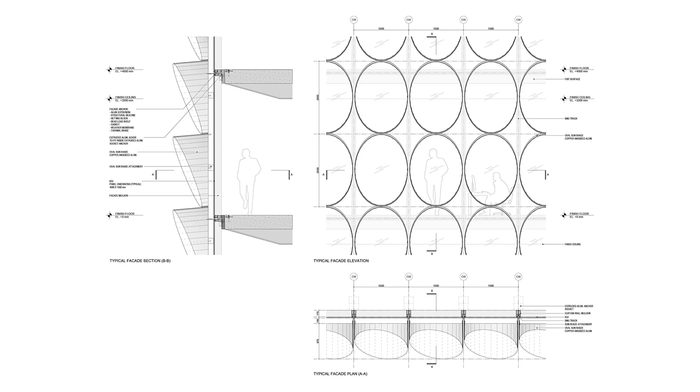This is a project we've just started construction on in Brisbane. The basic idea is pretty simple: we have these large oval-shaped brise-soleil elements that we discovered perform exceptionally well, particularly in that sun angle. They're tailored to the different facets of the building, and we thought they were incredibly beautiful.

They performed at a very high level, and they also created what we like to say is a kind of phenomena as opposed to form. We really loved it.

So when we started working on a project in the middle of design development in Brooklyn on the waterfront, we took that same idea of an oval-shaped oculi, took all the research and data we'd developed in the previous project, and applied it differently here, combining brise-soleil and balconies around the perimeter of the building.

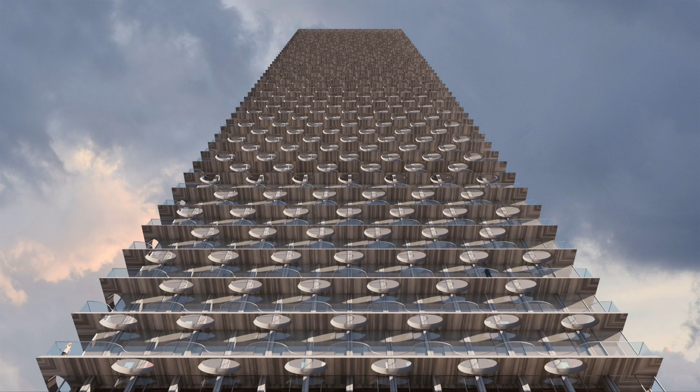There you see the oculi on the face of the building, and here you see the effect of the sort of moiré that happens on the side of the building, just to give you some sense of the aesthetic impact.

Okay, so that's just an example where I'm going to refer back to things. I have to be honest, part of the reason I included that little spiel is I didn't know how to bring those two projects into the discussion. So now we've got it.

Okay, so empowerment. As I said, for us it's really focused on flexibility. And what I'm going to try to do during the lecture is put forward a whole bunch of ideas that I think are new ideas about flexibility.

They may not be new to all of you. I'm just saying that for us, in the way we're approaching our thinking, we're starting to categorize them in different ways, and I want to challenge everyone to think about flexibility in a different way.

Our observation is that as a profession, we've been using an outdated idea of flexibility that we inherited from the modernists, who started it in the 1920s. So we've literally been using it for 100 years.

That idea is the idea of a blank slate, or because we're architects and like to complicate things, we call it a tabula rasa, on which or in which we can, in theory, do anything. That was the big modernist idea.

My favorite architect in the world, Mies van der Rohe, loved that. He probably took it to the extreme. If you know the Neue Nationalgalerie, it is exquisitely beautiful and an absolute nightmare to do anything in.

I think we can take this idea and apply it to all kinds of typologies, but it's particularly acute in visual and performing arts. In the visual arts it's the white cube, and in the performing arts it's the black box.

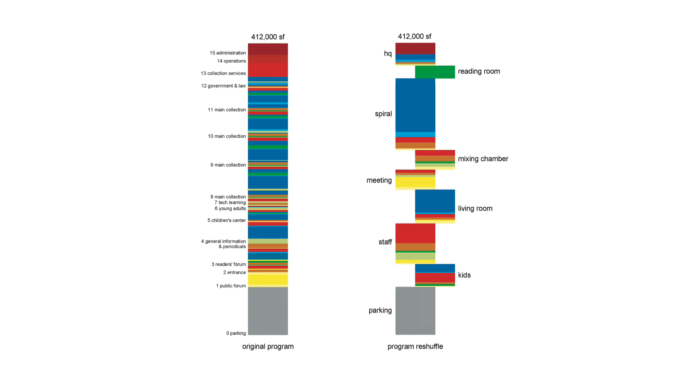So we combed through the program, and we made a series of what you see on the left. We call them platforms. Those were clusters of program that were sort of similar things plugged into them. And then the things on the right, those were more universal things that looked more like a tabula rasa, but we wanted to give them very specific characters.

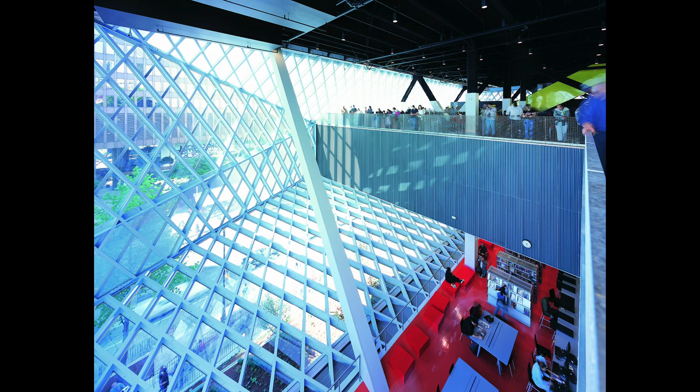And those got sized into what you're now experiencing. We call them the five platforms. Each one has a distinct architectural palette, distinct circulation, and most importantly, a distinct form of flexibility. And then there's the in-between spaces that act kind of like a public park that has been wrapped up vertically into the building. That's why the building has the very distinct characters you move through it. It's basically experiencing 5 different buildings with this continuous public park that runs through it. That was the evolution of the thinking of the building.

But let me give you an explicit example of how this idea of compartmentalization led to really profitable flexibility. I'm going to talk specifically about the book spiral and the mixing chamber, which are the two things that we collectively, I think, really invented for this project, and talk about why they became what they are. Because I think people know that there's a big book spiral up there, but I don't think they necessarily understand what the thinking was behind it.

It really had to do with this. Now, this was 2004, so we were starting in 1999. But even in 1999, we were seeing a lot of predictions about how access to information was going to become ubiquitous, and that public libraries were no longer going to be the place that you came to access your full breadth of information.

And therefore, we had to think of a paradigm shift in order to spend, at that time, $111.8 million, $111.9 million of public money. We had a lot of people saying how that should be spent. And the observation was, if access to information is no longer going to be what makes a public library unique, it's going to be access to curation that's going to make it unique. That we needed to make a building that was librarian-centric, not book, not physical material-centric.

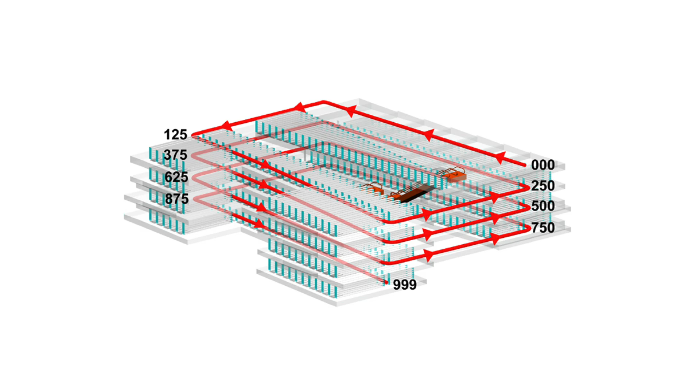The books are organized 000 to 999. Believe it or not, we did actually originally propose to put 000 at the top and 999 at the bottom, as you see in this diagram, with the belief that it'd be easier to circulate down, but the library very rightly said that's just so bizarre, we can't endorse it. So that's not what happened.

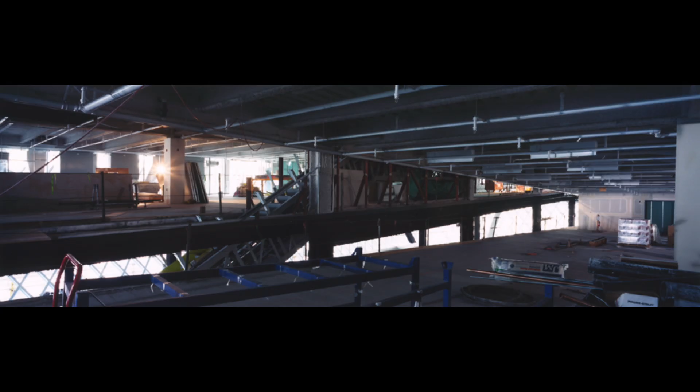And then it's literally just a parking structure. I mean, believe it or not, as much as people burn books, books don't burn as much as cars. So it's actually a much simpler problem to solve than even a parking structure.

Within that system, that's why the Dewey Decimal System is in the floor and in the elevators. As you have more and more books, you have micro expansions and contractions, the books, through reshelving, take different geometries on the book spiral. You just change the floor mats or the numbering in the elevator, so everyone can navigate with the Dewey Decimal System. That pulls the librarians out of these fiefdoms of materials and allows them to aggregate in the mixing chamber.

That, for me, was an unbelievably astonishing moment of, oh wait, tailored flexibility, really tailored specificity, is incredibly flexible. It went completely against everything I thought I understood about flexibility in architecture. That started what I think has become now a 25-year-long obsession about flexibility.

We call that approach, within our office, divide and conquer. Let me give you an example of using divide and conquer in a different way. This is a tower under construction, or two towers under construction, in Perth, Australia. They're mixed use: offices, hotel, residential, and retail.

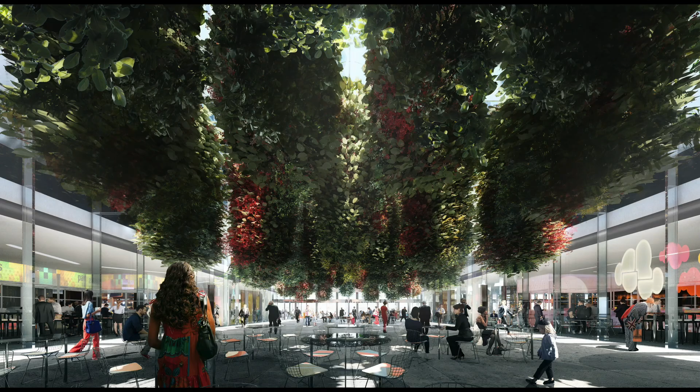So by putting the ballroom on the 27th floor, that becomes the place people want to rent for their wedding instead of the ones at the base of the other buildings. That allowed us to completely evacuate the base and provide retail and other public amenity there. Basically, pun intended, we turned the model of the other six projects around us on their heads.

But coming back to this idea of divide and conquer: all of that amenity space in the middle, we took the dimensions that, from a performance standpoint, the developers absolutely wanted. So if they said they needed a floor plate of X by Y, and Z amount of stuff, we literally made it, and promised them we'd come up with a composition while maintaining those things, that we think will be elegant.

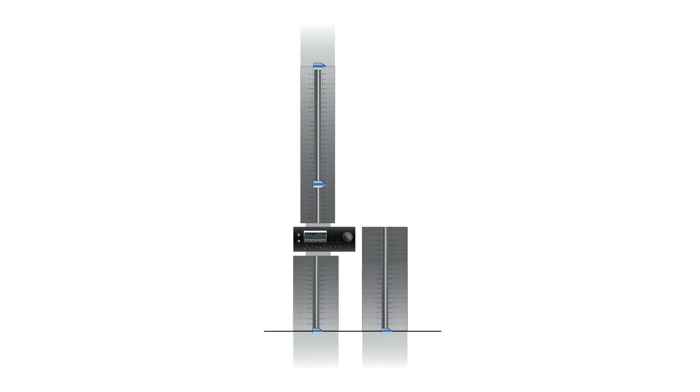There were several ideas baked into that. Once you do that, you now have the power to allow the building to fluctuate with the market. We've done several very large projects like this, and they all die. Why? Because it takes 6, 7, 8, sometimes 9 years from design to completion, and markets change, and at some point the developer almost always gets cold feet and pulls the plug. We didn't want that to happen.

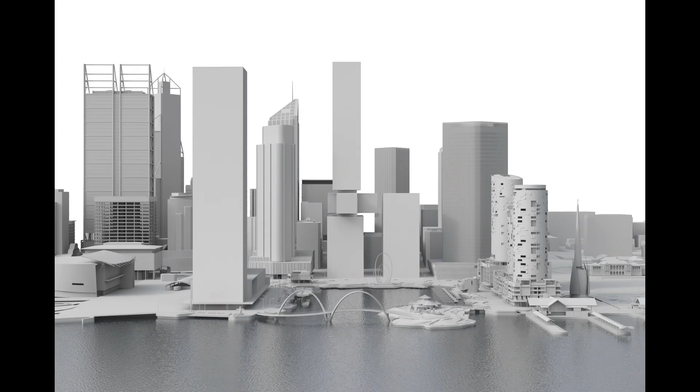So this was a way of safeguarding the project too. If we keep these different elements isolated, we could allow them to fluctuate like a stereo equalizer. Let me show you images we showed during the initial competition. You see how it's fluctuating. I suspect some of those you might like more than others, but if I'd frozen it and not shown you, you probably wouldn't have known these were radically different compositions or relationships of amount of stuff.

And what this meant is they reduced their risk. Let's say it was going to take us 4 years to get into the ground. This allowed them to reduce their risk to just 3 months, because that's the amount of time it would take us to freeze the overall envelope, send it to a wind tunnel test, design the foundations, and start construction.

So already, you're a huge step ahead of a conventional large mixed-use development. The second benefit was that by placing all that complexity up in the middle of the building, by the time we needed to know what that stuff was, it was going to be about 2.5 years into construction. We'd already frozen the structure and the envelope, about 95% of the cost, which meant the developer and contractor kind of didn't care what we did in there. So they let us go nuts.

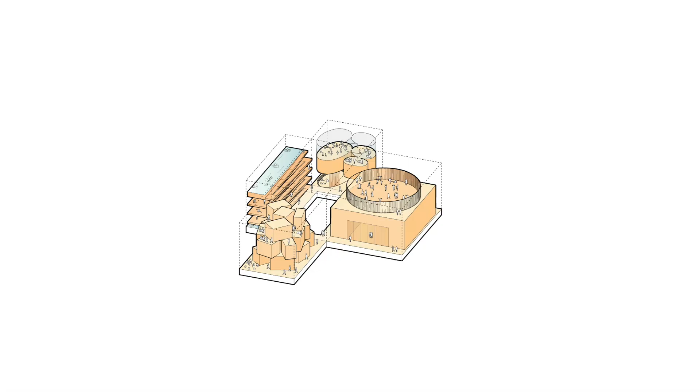Here you see what was going on in these different arms of the amenity spaces. They're all done out of lightweight, highly sustainable materials, so this is another form of flexibility—they could allow these to cycle and change every 5, 6, 7 years because it's all lightweight, sustainable elements. Anything we design could be changed easily during design, but also easily during the life of the building.

This is what I mean by they let us go nuts. They didn't care that we were proposing totally bonkers things, because we could only mess with about 5% of the overall cost, and they wouldn't get to this until about 2.5 years into the construction cycle. That meant we could advance all the construction documents incredibly fast—we could basically start the foundations about 9 months in, of which they only had risk for about 3 of those 9 months. So as a tool, divide and conquer was incredibly profitable.

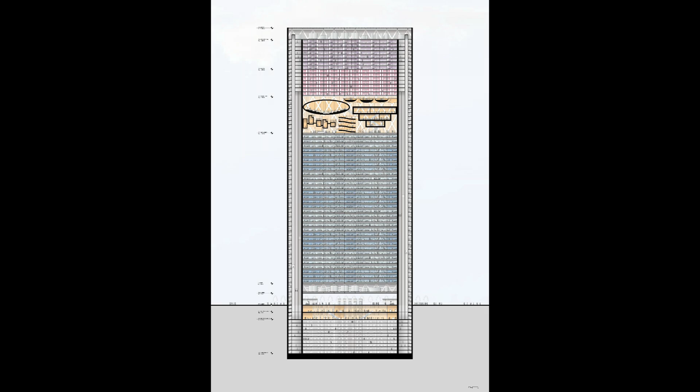This idea we've taken now to a tower in Mexico City. In this case, for various reasons, we actually could equate the office floors with the residential and the hotel. Again, we took all the complexity of the amenities and stuck it up in the same place, so it has very similar ideas, but its embodiment is quite different. The potentials are tweaked because we're working in Mexico, not Australia—different codes, different clients, different expectations for speculative offices in different markets. But you can see how this one idea evolved and was generative into different architectural manifestations.

Okay, so that's the first idea, divide and conquer. The second one we started to call presets. If the Seattle Library was the most important project, this had its genesis out of probably the second most important project in our early evolution, the Dee and Charles Wyly Theatre. It's a highly flexible theater.

I'm about to show two projects that are performing arts centers as opposed to theaters—the two other buildings can do theater, dance, opera, film, multimedia, small ensemble work, in one case symphonic work, and so forth. So they allow for typological difference, whereas this is predominantly for theater.

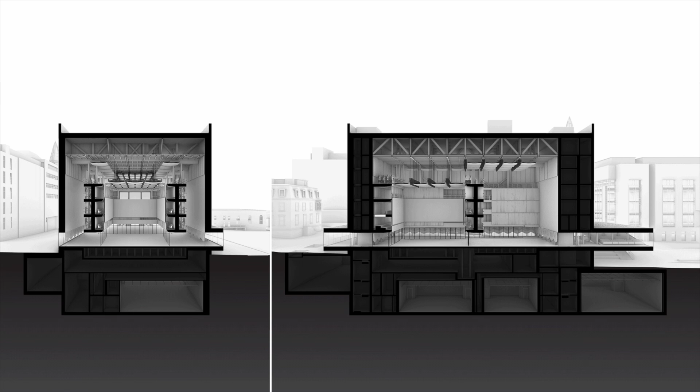Every surface changes. So we're going to start, and we're going to go to the multimedia configuration. The first thing you see is the back wall moves in, the ceiling comes down, side walls come in, and it creates a small cube.

Now we're going to go to a recital configuration. Jay here is shaking his head because he knows the insanity of what he went through on that.

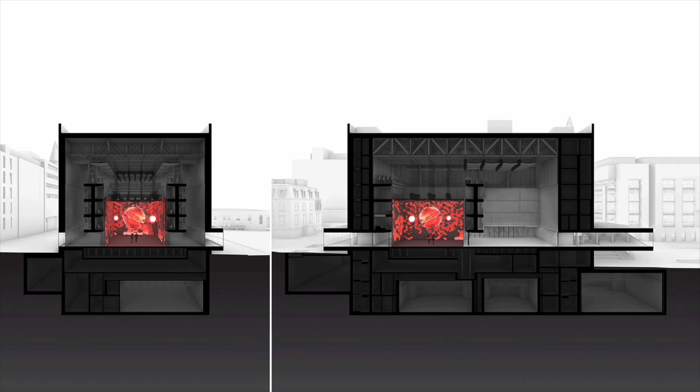Now the back wall is going to go back. The side walls, all 4 of them, will come in, and the ceiling will come down and create a very low and geometric top. This is now a perfect shoebox small ensemble space.

Now we're going to go to the end stage theater and dance configuration. Don't really need the ceiling much for acoustics. The 2 western walls go out in order to create basically a fly tower. The 2 eastern ones come in, and a deep rake comes out of the floor.

And now we're going to go to the orchestra configuration, where everything moves out. The ceiling takes a very specific acoustic geometry.

And then the last is the Armory configuration, sort of a big art space, which they can do whatever they want to. So let me show you some of what that looks like.

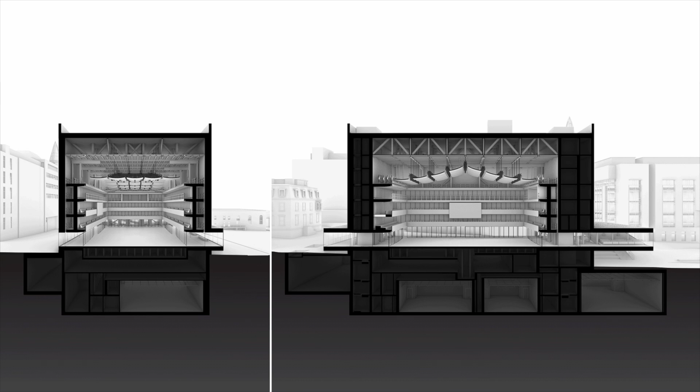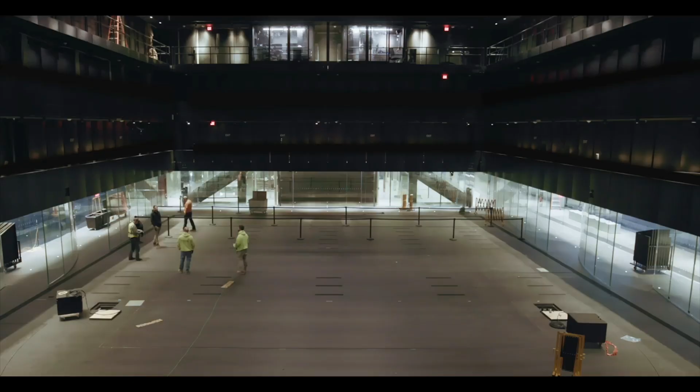Dance theater configuration, the multimedia configuration. This is being used for Carrie Mae Weems' installation, sort of an Armory configuration, and then the opening night banquet. So you see how quickly they can turn it around. So this is the time lapse.

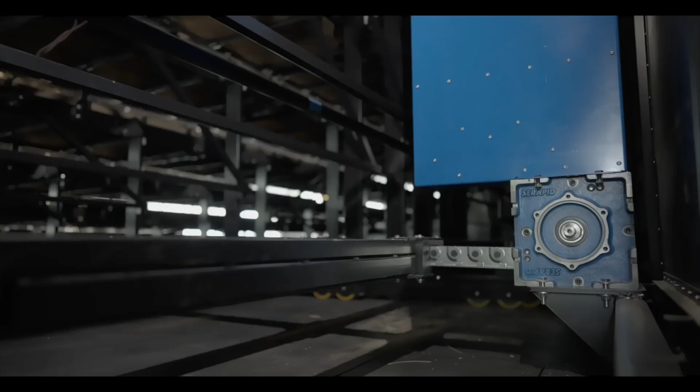We sped it way up, so I don't think you want to hear it. And so you can see that there are people in the space. I will say that this is really early on, some of the first transformations we did. They're now able to do it with just 4 people in several hours.

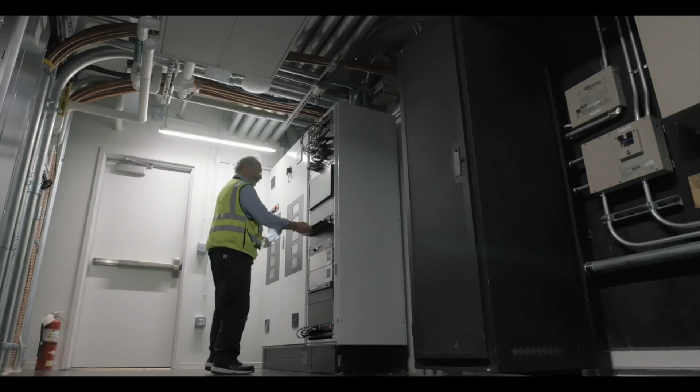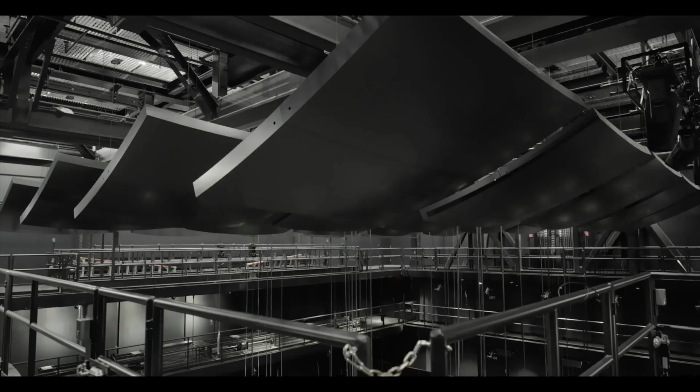The building has what we call NISCON systems. These are high-performance lasers that make sure that when you start to move something, if someone puts their hand in the middle, it doesn't take their hand off, the whole building will shut down. That was the thing I most want you to see. We don't yet have something with the ceiling actually moving into a larger geometry.

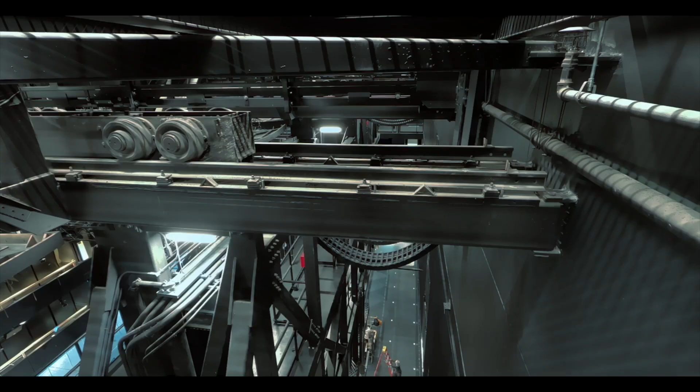But that's what I wanted to discuss about with Itzhak Perlman, is that with these transforming buildings, they're notorious for being good for a lot and great for nothing. Probably the most skeptical group that we were dealing with was the music department. They were concerned about the acoustic quality of the space.

When we first had the orchestra in the space to do a tuning session, the orchestra was there, but also a lot of the professors. While they were playing Mahler's Fourth, we just started changing the ceiling. At some point, the conductor stopped and went, 'Wait, what are you doing? What just happened? Go back, change it.'

So they started to play again, and we started to adjust again. And he went, 'Whoa, whoa, whoa, stop, stop.' And then the timpani player was like, 'Whoa, whoa, whoa,' right? And they started going bonkers because they realized the building was a huge instrument.

And what I was referencing about Itzhak Perlman is that what he performed was a piece that he said historically he'd never been able to do right, because you either hear the orchestra and it drowns him out, or you hear him and you can't hear the orchestra.

And we can change the ceiling in real time. It's not just when we switch from one configuration to another, and it's not just amongst movements. You can literally change the ceiling during a movement.

So during the initial performance, we took the ceiling and adjusted it just as he was starting the long cadenza. He came out afterwards and said, 'I've never had this experience.' People in the audience were like, it was crazy because I could hear his fingers on the fret.

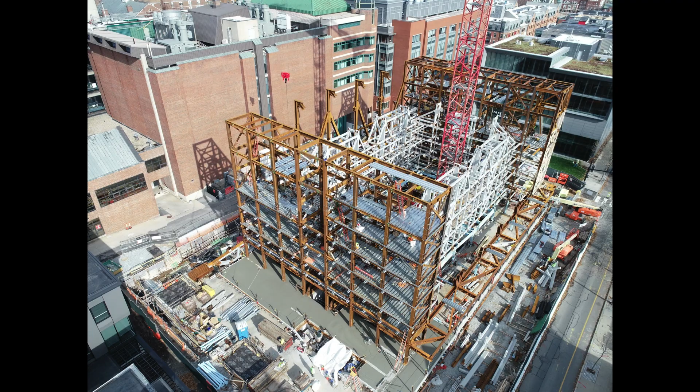In the office, we use the expression dumb. We say, "Dare to be dumb." For us, dumb isn't pejorative. Dumb means you've basically sussed it out by making it as dumb as it possibly can be, and that's how you're going to make it successful. So these are gantries, like industrial gantries on a big bridge. That's how this is moving.

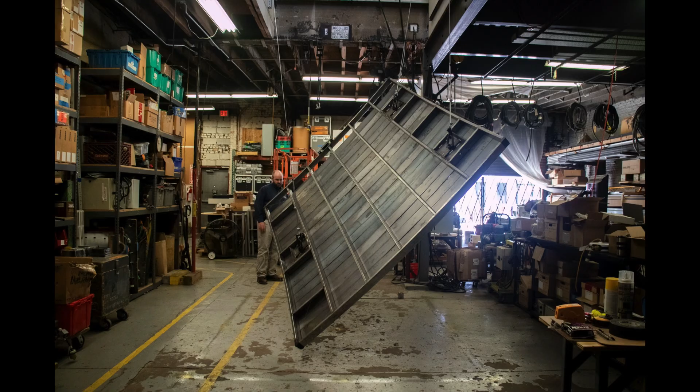The acoustic baffles, when you go to the US Open, you'll see a camera zooming around the space. It's on guy wires. You know that's fail-safe because if they broke and killed 30 people at the US Open, the US Open would cease to exist. And you know it's not going to break because they need it to make money on television. So we use the exact same systems to control the ceiling. The ceiling can do any individual thing, and they can create massive geometries together. We can use them independently as a theatrical component.

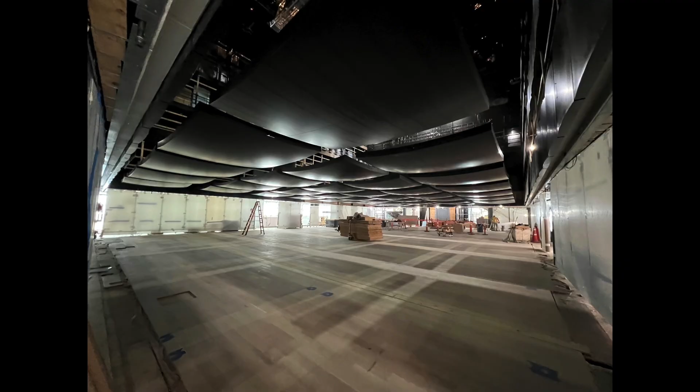And this was just something we did for fun. We took the whole ceiling and just dropped it down to 8 feet just to see what the space was like.

And the second idea is we cut this transparent swath right through the entirety of the building. So the first one was programmatic. They wanted to create a building that infused the arts into the environment and the environment into the arts, environment being their intellectual environment. Programming was one way to do that. So we created this instrument that allowed them to do it. But the other was to do it literally.

Could we create ability for students to walk through the building and literally watch the creation of art when the artists feel comfortable having them do it? And in areas like sound and light locks, we perpetuated that idea by having everything be highly reflective. But you can see in the main hall that the entire ground floor, the first 8.5 feet, is a glass enclosure. So this is what happens: you have people performing, you have students walking by and engaging the daily creation of art.

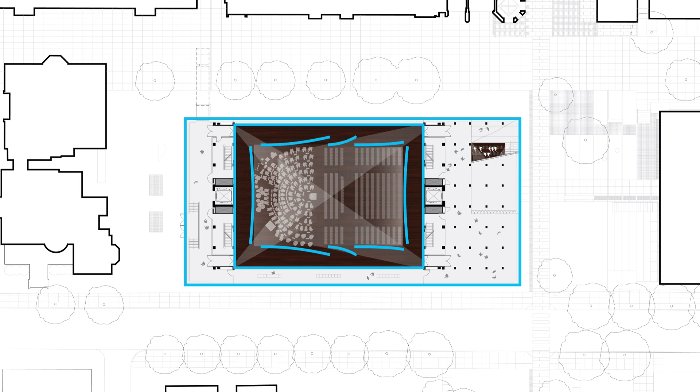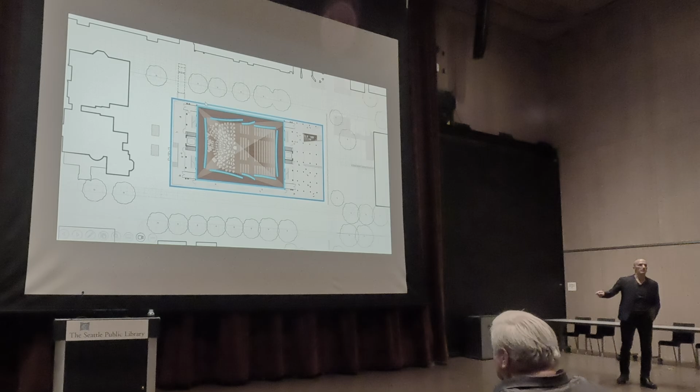From an acoustic standpoint, again, we started with a shoebox. That's the glass shoebox. I think most people think glass is a terrible acoustic surface. Generally it is, but not for the first 8 feet. For the first 8 feet, you actually want to use it to propagate the high-frequency sounds into the rest of the space. So creating these glass shells that have openings, so that some of the high-pitched frequency would actually get in here and rattle about and then come back, was actually super productive and makes the building have an incredibly high acoustic performance.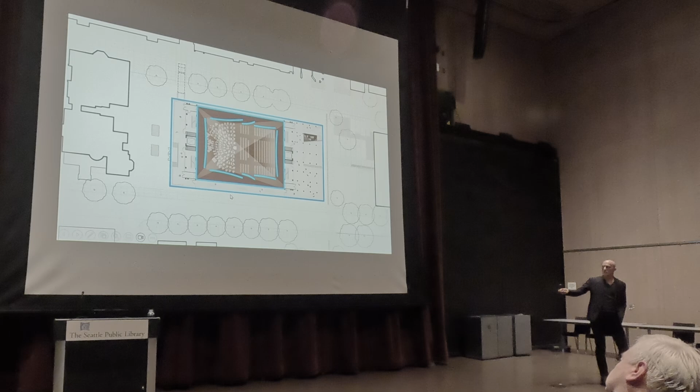This is the geometry that is the overall acoustic signature, and then we use the outboard layer to cut out, in the airspace between the outboard insulated glass units and this, all the low frequency that might be coming from the outside. So if you've got trucks with air brakes or a Harley Davidson, you can't hear it. That's basically the makeup that sound from the outside going bottom to top would have to go through, or sound from the inside going top to bottom would bounce off of. And there you can see the different layers.

And then the last thing I was going to say is that then we use this. I have a personal affinity for fluting. I don't know why. So it has this fluted exterior, and we took that as a motif, and it ran into everything. You see this fluting in all the different kinds of seating elements and the facade, and what it does on the exterior of the building.

Now, part of the reason we did this is that it was the only way we felt we could create a, quote, contextual building. Providence is an old city. They have a lot of relief in their buildings, and they knew we were going to do a very contemporary building, and this was a way to allow us to do that. Still have that relief, but do contemporary. I will say, when we talked to the Providence Preservation Society, tongue-in-cheek, we were honest about our being facetious, but we said it's fluted columns.

That idea of fluting we also obsessively used in a project we opened in 2020 in Washington, D.C. But here the fluting had a very different purpose. This was to create an office building that set a new standard for Class A office space in D.C., which really is about transparency. And so by curving the glass...

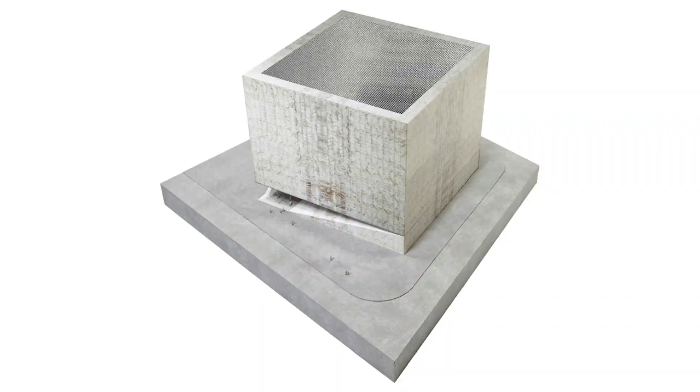But what's important about the building is what's hiding on the interior. The instrument enables them to make a building for work that's in production—nascent work, things they're co-producing. It's unknown. They'll have exceptional artists, but the pieces may be great or may be in early stages. This is rough work, things that challenge people. We need a building that responds to the art, not the other way around, not that the art is forced to respond to the building, which is how most performing arts buildings operate.

So sitting in the middle of the building is an L of reconfigurable theaters—nominally large, medium, and small. The last quadrant is rehearsal spaces, a scene elevator, and so forth. So there's the three, but they are subdivided by 3 massive acoustic guillotine walls, 2 at 46 tons each and 1 at 23 tons.

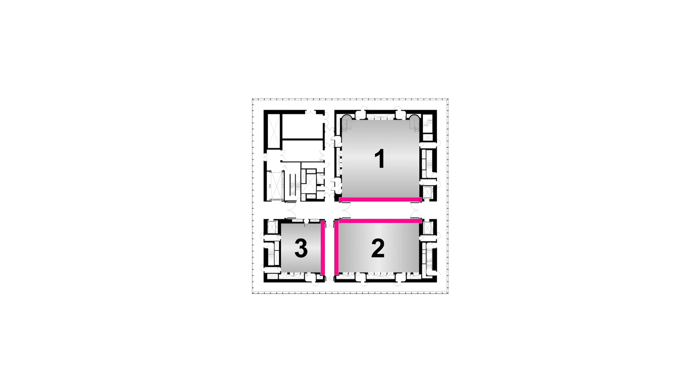There you see them operate. These are moved with scoreboard lifts—again, dumb technology, taking technology from other sources we know is tried and true and applying it here. They move in about 15 seconds, and they allow this system not to be 3 theaters, but actually 10 possible different proportions.

Within each of those proportions there are multiple stage-audience configurations. By the time we opened the building, we had already opened it with 62 fully approved stage-audience configurations. It's literally in a binder—I can only hear Mitt Romney talking about binders of women whenever I say it—but we have a binder of theater configurations that we give to artists.

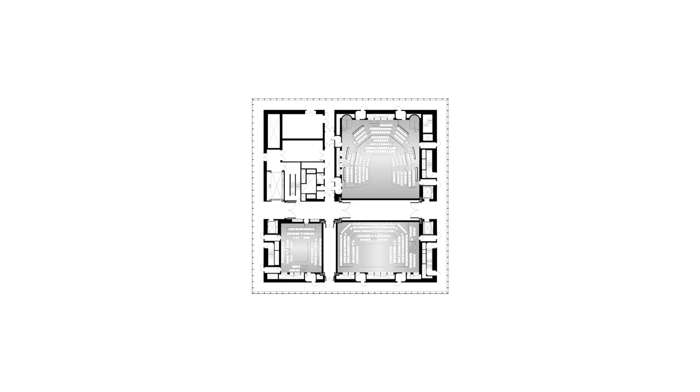And it's not only a multi-form theater, but a multi-processional theater. Around the perimeter and through them is a cruciform, and anything in that zone can be defined as front of house or back of house through massive acoustic doors. So you could have 3 distinct theaters. This is kind of the base condition: public circulating around the perimeter, and the center cruciform is all back of house.

But you could have a bicameral situation where people come in on the east side for a 7 o'clock performance, and separately on the west side for a 7:30 performance. You could have the central zone become a lobby, or create elements almost like a palate cleanser that you move through to put you into the headspace of a performance, or into the suspension of disbelief.

You could have the public have a Wagnerian experience where they encircle a performance and everyone comes from every side into a theater in the round. And then any combination and permutation you can imagine of circulation and configuration.

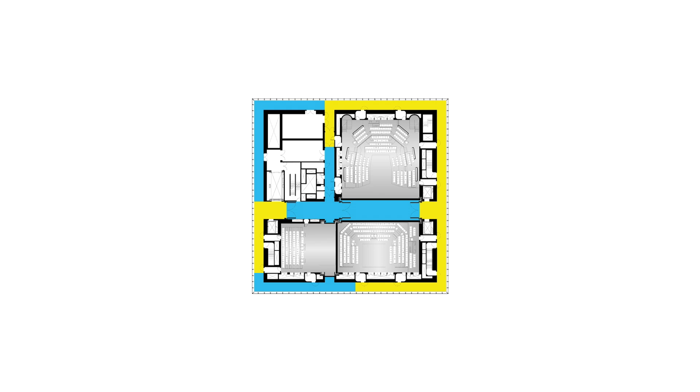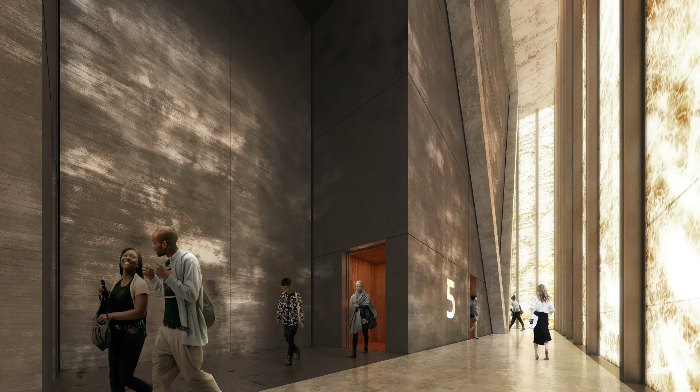So that's why early on I talked about the Lindemann being an instrument. This one is not as automated, but that's because with that incredible array of configurations, we had to be strategic about what was automated and what was manual. I'll show a bit of that in a moment.

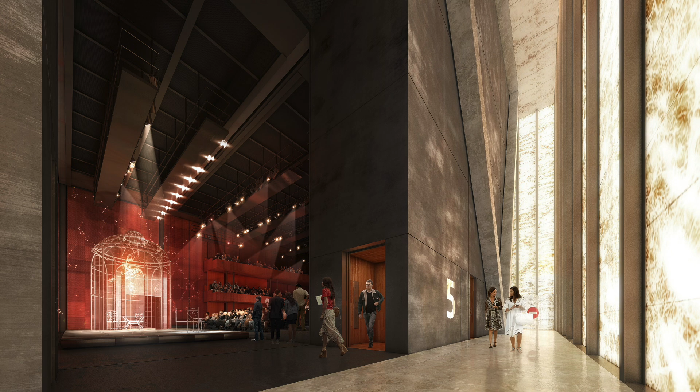Just to give you some sense of what this looks like—this is people moving around the perimeter. This is now all back of house. This is using it as a lobby, one of these palate cleansers. This is a true Wagnerian experience with the public—there is no procession, you just move directly into the stage.

Looking from the interior—for various reasons, including security, it's hard to photograph the building, so we don't have much, but I'll show some in a moment—moving from theater in the round to an end stage, to a deep end stage, to an even deeper rock concert configuration.

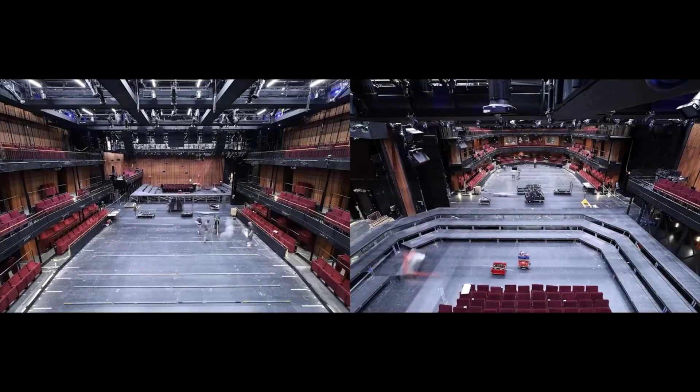I'll talk over this, but this starts to show how it's less automated, though in some ways it's a much more facile kit of parts—tools we have to go through these different configurations. Okay, you get the point.

Oh, there it is—so the big walls you can see here, these are the massive hooks we use from the Spiralift. These are one of the most beautiful pieces of technology I've ever seen, used for moving very large and heavy objects, usually in storage facilities, and we use that to convert the floor system. These are not...

This is that moment the antihistamines kicked in. They are not hydraulics—this is literally a rigid tube being fabricated out of something about this tall, with basically a bicycle derailleur element sitting in a drum.

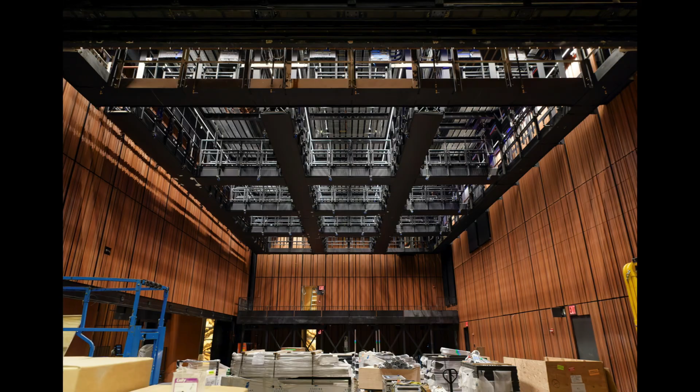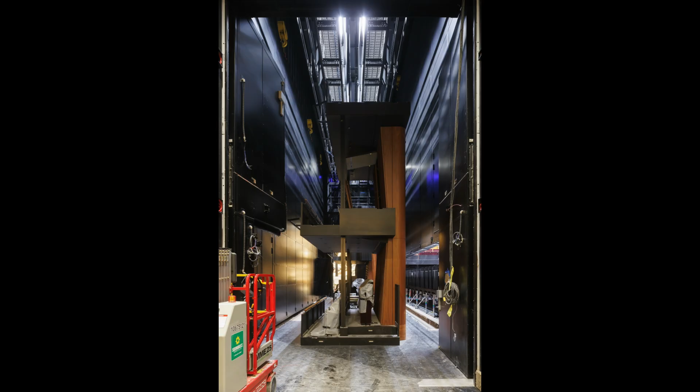This is a removable gridiron that allows them to have similar heights. If they want the mid-size to have the same height as the small, they can add this gridiron. These are some of the movable balconies, and then the movable seat sets.

What I actually want to talk about for a brief moment is the difficulty of acoustics, because in this building there's a lot of what I call productively losing control, which is to say that we kept coming, both with the composition of the facade and with the acoustics, into situations in which a very fixed approach wouldn't solve the problem.

Acoustically, this is a perfect storm. You have 10 proportions. You have 62 stage-audience configurations. So you don't know where the stage is. You don't know where the people are. You don't know how many people. You don't know the proportion. You don't know if the performers are spoken word or instrument. You don't know if they're amplified or acoustic. It's a nightmare. And we worked with the same acoustician on both projects.

It was clear in the Wyly how we were solving that problem. But here he came up with a really beautiful idea. He said, give me a forest clearing. Why a forest clearing? Two reasons.

The first is what we call boundaryless space. Any sound that goes out into it doesn't hit a really clearly defined thing, so someone who's very acoustically astute doesn't hear a defined shape. But every bit of acoustic energy will hit something, and it will always come back. It'll hit a leaf, it'll hit a branch, it'll hit a tree trunk. It always comes back into the space. So it holds onto the energy, and that's an ideal environment within which we can use variable acoustics.

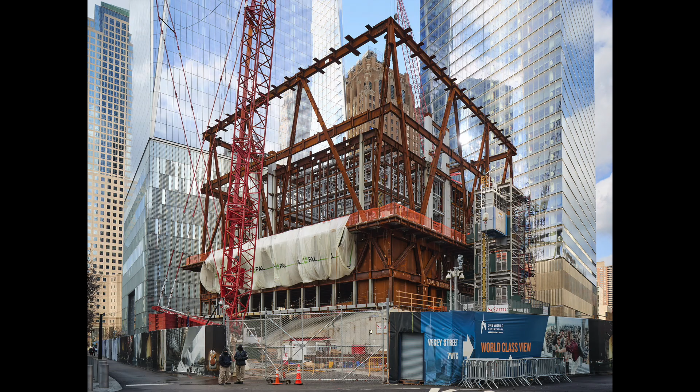But we had this big bucket, and so we built the theaters as fully isolated structures, isolated from each other and isolated from the rest of the building inside that big bucket. And that's why when the building was going up, people said, why are you building little buildings inside the big building? And we said, because we're building little buildings inside the big building.

So that brings me full circle to where I started: we wrapped the building in translucent stone, hiding this incredibly dynamic thing. I'll also add that draping the building in something was a requirement, because the design guidelines dictated that we could not see any commercial activity from the memorial. So you couldn't see ticket sales, intermission, or the restaurant and bar. That was also a dictate.

I'll also say that the first 21 feet of the building isn't ours. We designed it, but that's all part of the Port Authority infrastructure. So there are a lot of unusual moves and twists in the project that most people assume came out of desire, when actually they came out of obligation, and then trying to find an interesting way to solve it.

But to come back to what I was saying, we realized at some point there was a beautiful tension between the simplicity of the enclosure and the dynamism of the interior. We started calling it the magic box—this idea that instead of a building revealing itself to you over time, the more you use it, the more it confuses and mystifies you over time. You simply don't understand how all this different stuff is happening within this relatively small building.

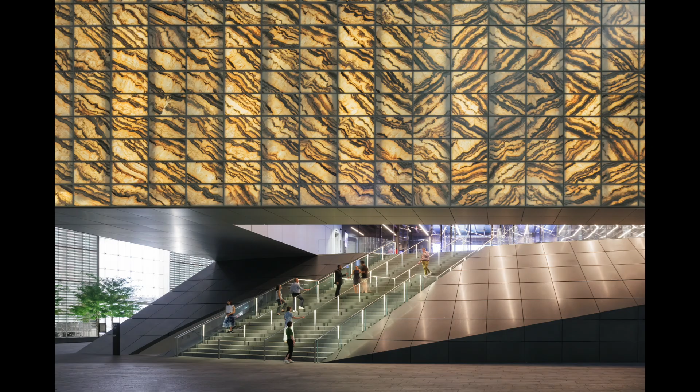All right, and then just to show you the few images that I've surreptitiously taken over the last couple months of the different things going on inside, and then just a few more random photos.

Oh, actually, there was a point to this, which is to say it was interesting how that led to also using devices for suspension of disbelief. Yes, we had to put the lobby 21 feet in the air—that was a given. But ascending up into an opaque or translucent thing creates suspension of disbelief. You're rising up into a world that, once you're on the inside, you can no longer orient yourself. Now, if you can't orient yourself, you still have to navigate, which is why the navigation is dumb—anyone can find their seat, but they don't know where north is. And then you go from these incredibly tall spaces through an 8-foot tall sound and light lock. Spatial compression is another historic device architects used for creating suspension of disbelief.

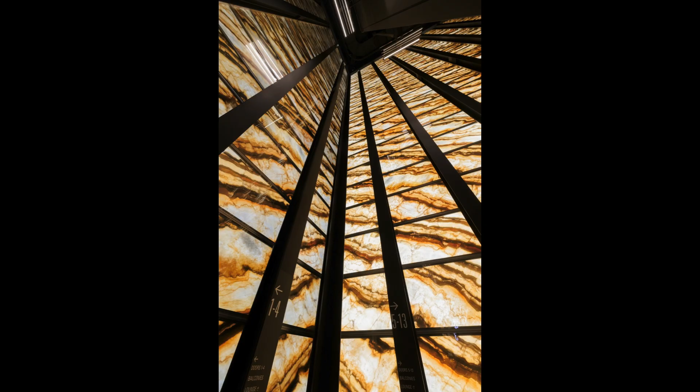Okay, so now I'm going to talk about—how are we doing? Okay, we're about 55 minutes. I have, well, I'll just keep going. If you guys want to leave, you just leave.

I don't—so then the third one I want to talk about we call flexible array. This one we really explored as the antidote to white cube spaces in museum projects. But subsequently we started to find it had incredible usage in other typologies as well. Let me first start with it being the antithesis of the white cube.

Basically, the thought was—are any of you artists? There are a lot of architects, but how many of you are also artists, or just artists? The fear of the blank page. This is one of my own zinc plates from graduate school, where, like most people, I would just take the zinc plates and scratch them on a concrete column. Don't tell—I used to do that actually in Le Corbusier's building, don't tell anyone. Or putting acid on it, so that painters will gesso their canvas with newspaper or whatever, so they have something with which or against which to work, and they find that freeing.

Well, I think it's similarly true of institutions trying to curate exhibitions. So this was that idea: how do we create an array, a kind of predefined array, with which or against which curators could work? This started out for a museum we're doing in Oslo. I will say we actually won this competition three times and still didn't get to build it—it just opened, designed by a Spanish architect. But let me talk about the two underlying ideas. The first was, okay, don't do a white cube.

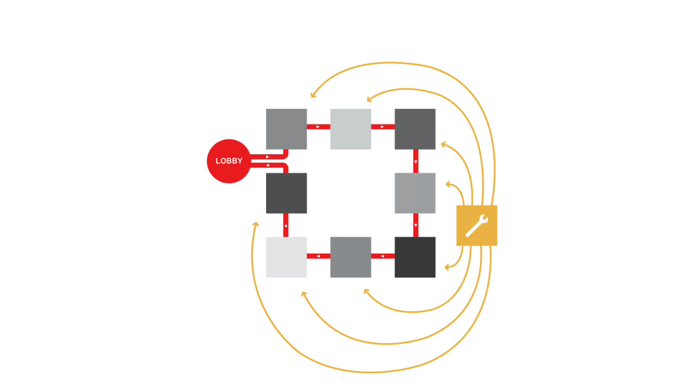Why? Because that means you always have to do massive shows. If you start something in one room and it's this linear necklace of gallery spaces, you have to shut the entire museum down. Anyone who lives in or visits New York knows it's an infernal experience because the museums are never fully open.

That's how they're all organized. So the idea was to put all the assembly elements in the middle so you could access any one of the galleries individually, with the public circulating around the perimeter so you could install or deinstall without taking the whole building down. Those were the two initial ideas, and they led to this plan.

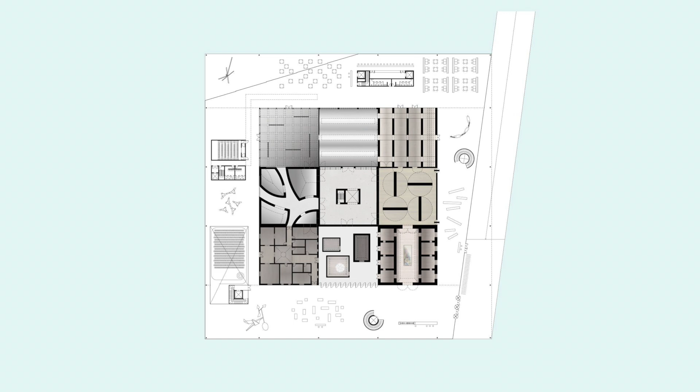We were doing this for a competition, so we couldn't work with the client to come up with different typologies, which is why we're showing these in gray, but these were the different experiences we had.

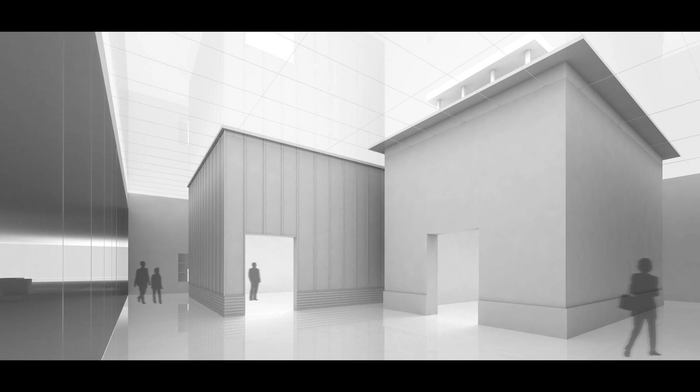This was their national museum in Norway, near the site. This is an Edvard Munch museum. This is Munch's studio in Ekely. This is the Frick in New York. This is any number of Frank Gehry galleries. This is the Neue Nationalgalerie.

This is any number of galleries in Chelsea, New York. This is any number of Renzo Piano galleries. This was a ripoff of our own museum that we did.

It's the shortest-lived building of all time—it lasted about nine months—for the Guggenheim and Hermitage Museums in Las Vegas. So that was us reinstating it.

The public would then move around the perimeter, poking into any of these different gallery types. This was what the power of this flexible array idea would get them: they could do one huge show, or they could do eight distinct shows.

They could almost have an experience like the Louisiana Museum in Denmark, where you go into a gallery, come out to a palette cleanser with an amazing view, and then go into another one. This is built in the middle of the Oslo fjord.

But there's another benefit. Weirdly, their program asked for five-eighths contemporary galleries and three-eighths classical galleries, which seemed odd given their collection—the Munch and Stenersen collections. So we provided that.

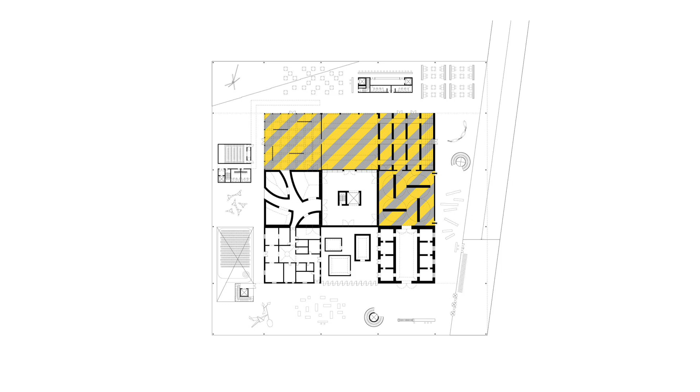Similar to what we were doing here, we created different forms of flexibility for each gallery, such that four of the five contemporary galleries could also morph into classical galleries. So they could have a building that was basically almost all contemporary or almost all classical. Some of them could also move further to create something the size of the Turbine Hall at the Tate Modern.

And so it creates this, which I'd call some kind of—not quite a tool, but that's why we call it a flexible array. I'll go back to that initial reference of a zinc plate: because I was terrified, I put something into it so that I was reacting, rather than having to work against a blank canvas.

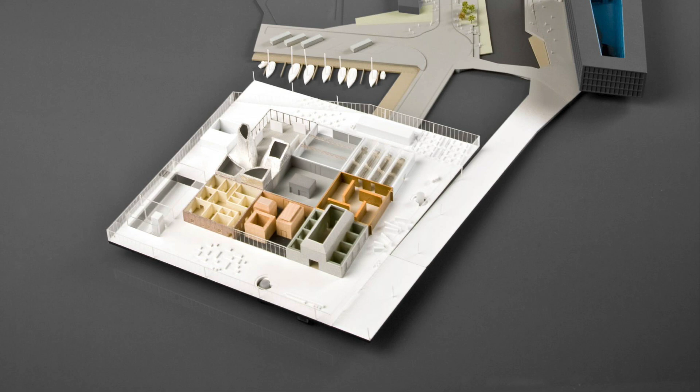I just think the section is nice, so there's the section—and at night. Now, this is an idea that to this day we haven't convinced anyone to build. We keep coming in second.

This is the Museum of the 20th Century in Berlin. It's directly opposite the Neue Nationalgalerie by Mies. We wanted to do literally the updated version—test out our idea compared to Mies's version of the white cube. It has probably my favorite plan we've ever done.

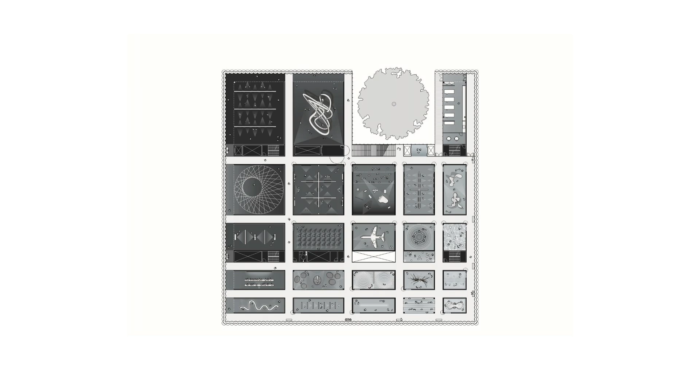This is one of the two floors. Basically, we gave them a gradated grid where one corner is really big and it goes to really small. This was super tall. The upper floor had ramping so that this area is super tall and this is super short, and the next floor was the opposite—tall here, short there. So they had this incredible array of different gallery dimensions.

And then it's punctuated by different things—some have a cupola, some have different architectural experiences, some are double height, some have skylights, some don't. What was interesting, and I probably should have kept the diagram in, is that instead of... there's a really beautiful museum by Sejima Nishizawa called the Kanazawa Museum.

And it is a field of different dimension boxes, and that's great, but it's a navigational nightmare. And they have a problem because all they can do is use the dimensions they've got, or take the big ones and make them small. So they can have mixed or all small.

The advantage of this is that it is incredibly banal to navigate. You could do a show here and have big, or do a show here and have small, or subdivide and have different dimensions. So it actually weirdly gave them the full spectrum of flexibility within something that you think is incredibly rigid. It was interesting to see, when you really start to map out how they would use the gallery, the advantages it gave them.

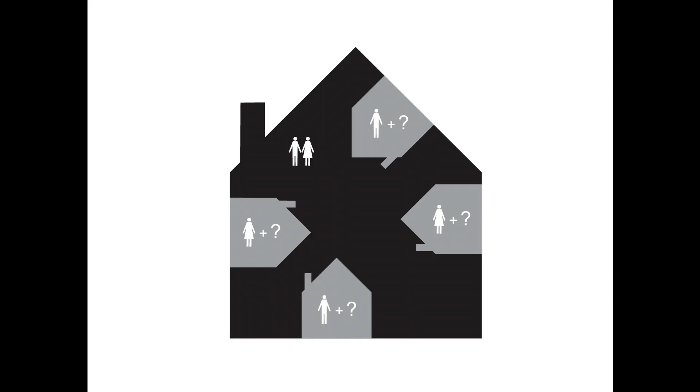So this is a house. It is a very big, very expensive house. We typically call it a mid-sized cultural institution that someone's going to live in. It is on an extraordinary piece of property. And we won it through a competition. Normally we wouldn't do competitions for houses, but this was obviously a unique challenge or opportunity.

The brief was really unusual. There was a patriarch who had 4 children, and he wants the children to live with him. So he wanted a house for him, his 4 children, and their future families. Kind of an odd request. He also wanted it to largely be on one floor so that he could spend the rest of his life here, so if he became wheelchair bound, he could access all the different residences.

He wanted it not to be a compound. He wanted it to be a single structure. He wanted a grand American stair, which I have to admit, I have no idea what that means. And lastly, he said the thing that terrified me: I wanted it to look like it has always been there. And we knew there were other people in the competition who do that really well. We frankly didn't know why we were in the competition.

People whose firms might sound like RAMSA. No, I guess we would. Okay.

So our approach was to take these elements and wrap them into a ring. We call it the necklace residence. We put his residence for him and his wife at the promontory. So it has this kind of ideal where his residence is actually at the ocean, but as you go into the site, it's this incredible old growth forest.

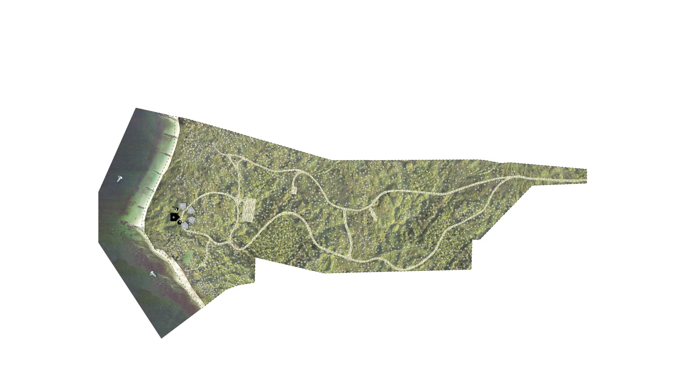The building slopes down going into the water, but it also slopes down going into the old growth forest. The building starts on the footprint of an existing building, so we didn't use the foundations, but we weren't clearing more trees than we had to. We started there, and then it kind of goes out into the middle of the forest. You can see it gets up to almost 35 feet in the air in some areas, so you get this incredible treehouse-like quality. Half the building's at the beach and half the building is a treehouse in the middle of the woods.

But this is the idea of flexibility. He really was clear that he basically wanted us to make something for him that he would design with us, and then 4 generic houses for his kids. We thought this was a terrible idea for a whole host of reasons.

First, we didn't think his kids were going to live with him, and when we told him that, we said that's not the way to get your kids to come live with you, by giving them a bunch of generic condos. But second, let's say they do want to live with you—wouldn't it be great if they had difference, and they could say this house more suits my lifestyle, and that one suits more this child's lifestyle? Or they don't live with him and they timeshare: at Christmas, I want the dice house, and at Thanksgiving, I want the barcode house, and so forth.

I won't tell you which ones, but if you squint, these are all based on what I think are the most important modern American, or mid-century modern houses in America. They just have references about basically organization and how one might live within them. There you see the plan.

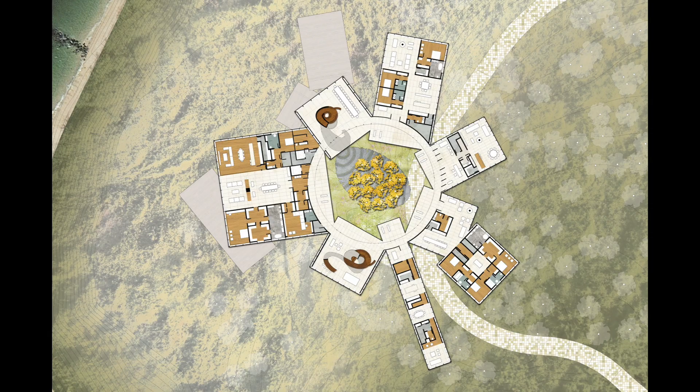This is the courtyard in the center. It has quaking aspens so you still get a canopy, but you can see across. This was a very intentional thing. A lot of things I told him he didn't like, and one I said is, you're going to be the world's biggest empty nester.

So all of these houses, which have their living spaces and dining rooms facing the central courtyard, have big pivot walls, such that if the kids are not there, they close. The experience of the father and mother would then be their residence, the two communal pavilions, and then this trapped secret garden. But they don't see the emptiness of their children who don't live with them.

There you can see one of the two we call modern American stairs. We didn't know what that was, so we just took the interior wall that was running around and squished them into these pavilions. This is the other one.

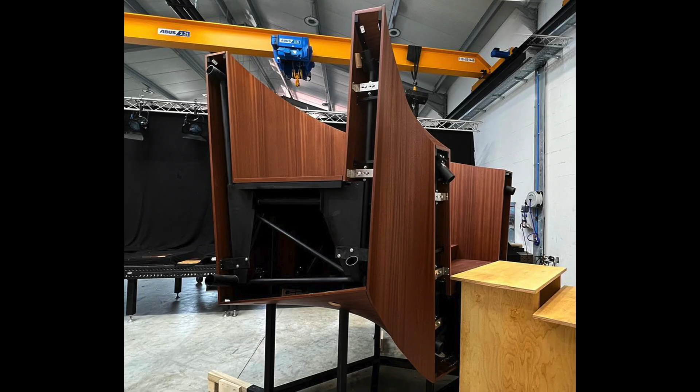We had to actually rationalize all these things such that we could create foam formwork that we are slumping the veneers onto in order to make different panels. But you can see the insanity of how accurate these people are. It's a German fabricator and a German veneer company. You can see how incredibly accurate they are.

And we were playing with two different woods. That's why you see that one is oak and one is mahogany.

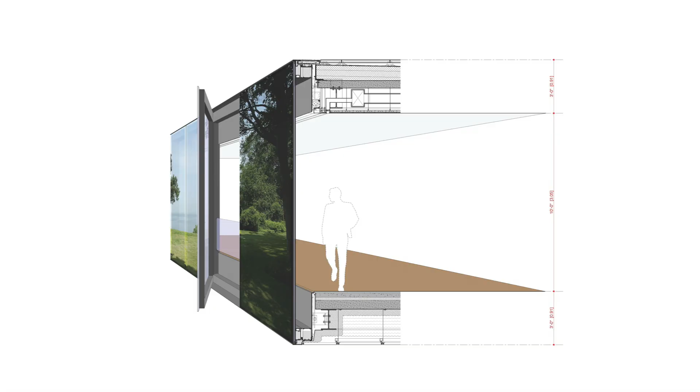And then the last thing was, how do we solve this problem of making a house that looks like it has always been there? Our response was, because we don't know how to do that, and we would do it badly if we tried, let's make a house that looks like it has never been there. So there's a pun that I think only architects will get, in which we took the detailing of the Farnsworth house and wrapped it in one-way mirror glass. So the whole building is a huge mirror.

Which weirdly had a totally unexpected side effect, which is, this is in a very wealthy neighborhood. They had to go get planning approvals. We were consolidating, basically instead of building 36 McMansions, they were going to build this. It was smaller than the total aggregate, so there was reason to let us do it. And it wasn't going to be 36 septic systems, it was going to be one. All kinds of fewer cars, not 120 cars, et cetera. But it was going to be a big thing.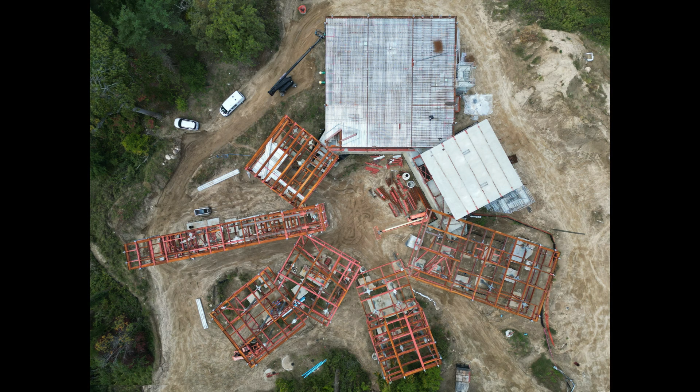This is some of the facade mock-ups. Here you see the steel under construction. Very difficult structural problem because you have some that are anchored and you have some that are out sort of literally floating in the wind. So from a structural standpoint, this is a very unique challenge.

Okay, so I have two more ideas I want to put forward. They're both much more nascent. The first one I call intensification. And the best example, but this is also something we did with Jay. So even our losers we did with Jay.

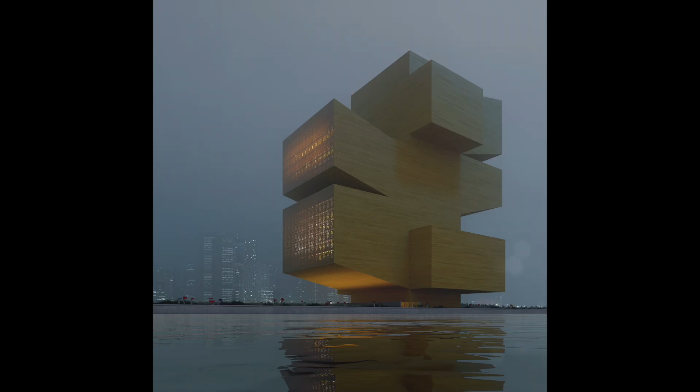This is an opera house in Shenzhen, which we came in third in the competition. And one of the other people that we worked with on this building here came in second, unfortunately.

Let me go back to this image. They asked for a kind of a sad thing. They just kept saying icon, icon, icon, icon, icon all over it. That's all this said in the entire brief. It's like a 180-page, very complicated brief, and it said icon like 2,000 times. And the problem is, when you try to build an icon, you probably aren't going to. I will say that the winner tried to build an icon, and it won, and you can say what you will about it.

And the other thing is that they were going to build this on a man-made piece of land and then put this massive, sprawling complex on it. And this is a city that doesn't have any public space. So that was the challenge as we saw it.

How can we make an icon, but actually have a reason for the iconography, that it's performative, and that we can resuscitate all of this land? And so there are two exemplars.

This whole idea of the large opera house with multi-facilities comes from the late 50s. The two archetypes are Lincoln Center and the Sydney Opera House. They are programmatically almost identical. Both have these four: an opera house, a multifunctional theater, concert hall, and operetta. And weirdly, they both started construction in 1959.

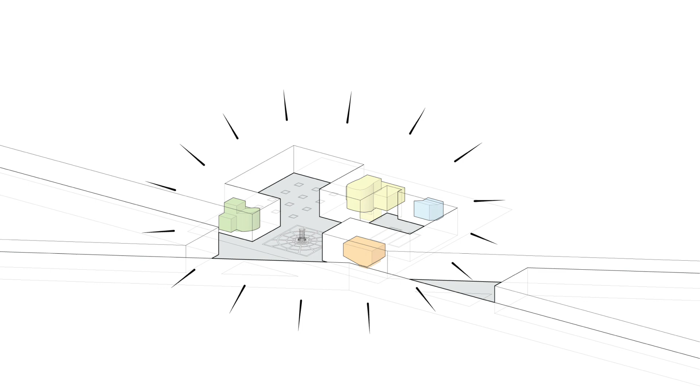What is the idea behind it? They strategically move these different elements around on the site to create a really important carve out of public space within the notorious Manhattan grid. And then, because they were all done by different architects, they used the notion of motifs to allow each one to have uniqueness, variance within it.

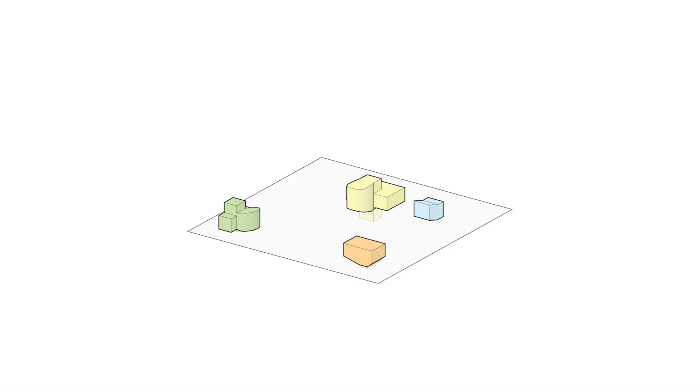That's the first model. The second model is Sydney. While I think Sydney is extraordinary, it has created the scourge of what we like to call the blanket of iconography, which is: forget the stuff that we're designing, it's all about the big, super exciting blanket that we're going to put on top of it, and it's going to be super expensive. Damn all the performing arts infrastructure beneath it.

And if you know these projects, you know that this is the typology that everyone is doing. So how could we do something counter to that? We started with Lincoln Center, and we did what everyone thought was insane. We stacked it to great potential effect.

So now we're not building a superfluous structure to give it its iconography. It clearly has iconography. We're freeing up the ground plane to become the first major public park in Shenzhen.

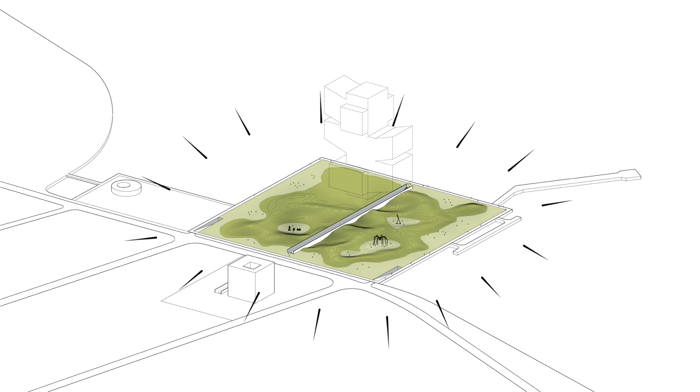But there was this idea of intensification at play also, because architects don't spend enough time being obsessed about the pragmatics of what we're designing, so we miss these incredible opportunities.

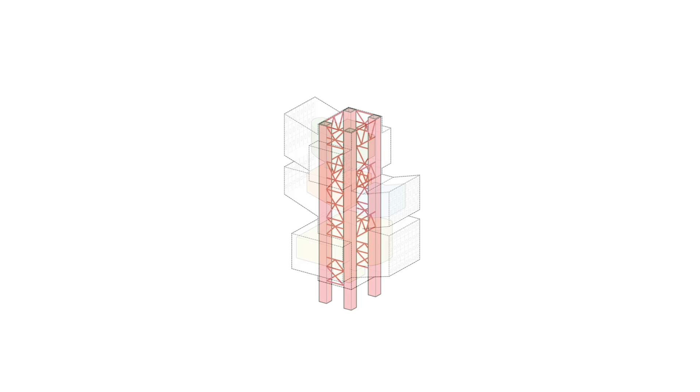This is the building sort of X-rayed. Sitting in the middle of it is this structural tower. And in that structural tower, which holds the whole building up, is the most insane set of redundant vertical circulation you can imagine.

And we're not asking for more vertical circulation than they would have built. We are asking for more shaftway, but not more elevators, not more elevator motors and so forth. We're just asking for them to be organized in a very specific way.

Why? Because what most architects don't think about is that from a staffing standpoint, if you look at Lincoln Center and the Sydney Opera House, they cannot afford to have these places operating simultaneously. So the ballet will start at 6:30. You ever wonder why Lincoln Center Ballet starts early? Well, because they're not as powerful as the symphony, and they're not as powerful as the Metropolitan Opera, so they get the worst start time, 6:30.

They start, and all the ticket people and docents and everybody else go over to Symphony Hall, which starts at 7:15. I get that out of the way, and then they all go over to the Met. The Met gets the best time. So the reality is these things are not being used contemporaneously.

The performances are very sophisticatedly staggered so that they're not actually happening at any one moment, which means if you've just built all those elevators—and we actually proposed fewer elevators than we would have necessarily done if these were all sitting on the ground—first, you create what for us was the most exciting section we'd ever done.

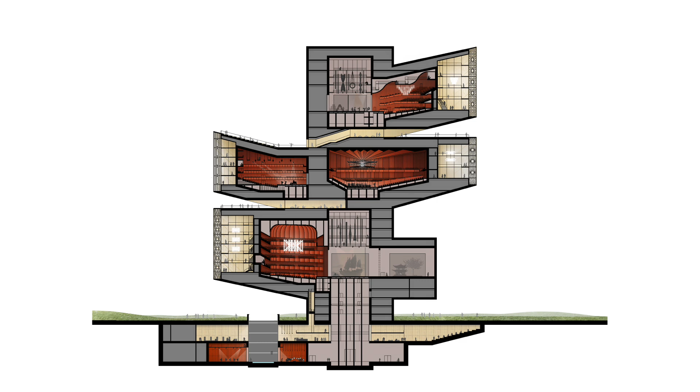If you start doing a hardcore elevatoring analysis, the performance is unreal. Look at the times: before performance, worst average waiting time during any 5-minute period is 1.9 seconds, 14.8 seconds, 12.4 seconds.

20 minutes to get everyone out of a major symphony hall is considered exceptional. Here we get 7 minutes, 9 minutes, 13 minutes for the multifunctional theater—getting close to the high end of exceptional, but still in that range.

Right, so that was the power of the stacking. And think of the iconographic benefits and the advantages of what you got in terms of the ground plane.

And then we just programmed each one with very unique motifs. So this was the opera house, and it had this kind of sunrise motif. You can see it in the lights, in the screens, in the main chandelier within the opera house. And then this was the starburst motif.

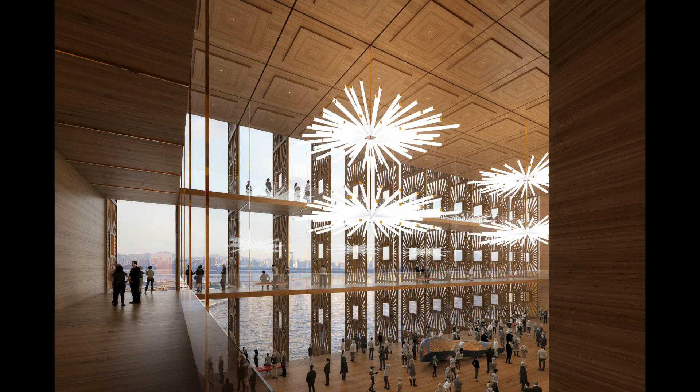This was for the Symphony Hall. Again, it's in the chandeliers, it's in the screens. And in the main hall, it's in the organ, which we also used as an acoustic reflector for the space.

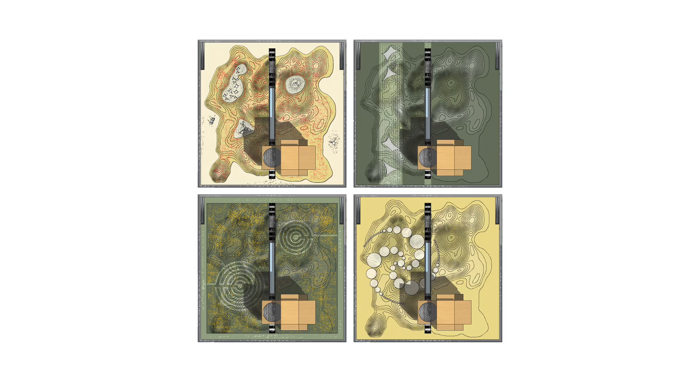And the other result of this was that we had a ground plane that we proposed to just plant with these super quick growing grasses. They'll grow to about this tall in about 2.5 months, and then you just mow different things into it. So in this case, you're mowing in like the king, Storm King, it's a sculpture garden. This is some large event space, so they mowed it all down towards the water. This is just weird follies. This is, I don't know what, but just get the sense of now they have this canvas, also flexible, to be able to use this big civic public space and design it, and then in 3 months, it's an entirely new thing.

Okay, so the last one I'm just going to talk about for 1 minute because it's something that we've just started working on. It's weird to even show you. You're going to see us doing renderings out of Enscape. But we're working on a really interesting typology for Kia. They've asked us to do 2 epicenter dealerships because they're consolidating all their dealerships in Korea into just a few structures, but they want it also to be civic buildings so they can do performances and other kinds of elements into it.

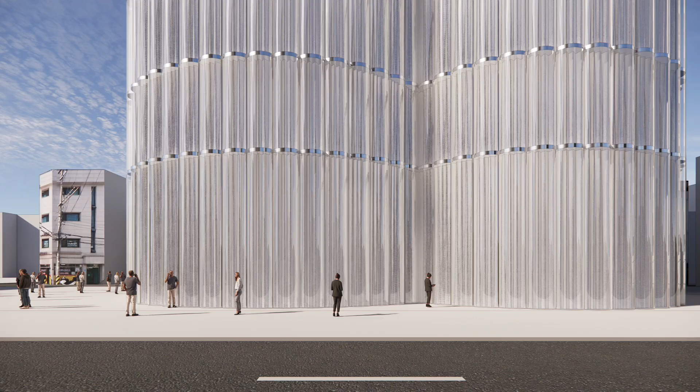And I'm not going to say much about it. And just as intensification, we're not quite sure how this fits. This one, I don't know what this is. This is basically just making a pure tool, that's the best way I can describe it. Where if I think about the Perelman and the Lindemann as being instruments, this one's more a tool, it's a little bit less poetic. So of course display of automobiles was important, but the ability to radically reconfigure the spaces, they will move the cars in and out on a daily basis and different things.

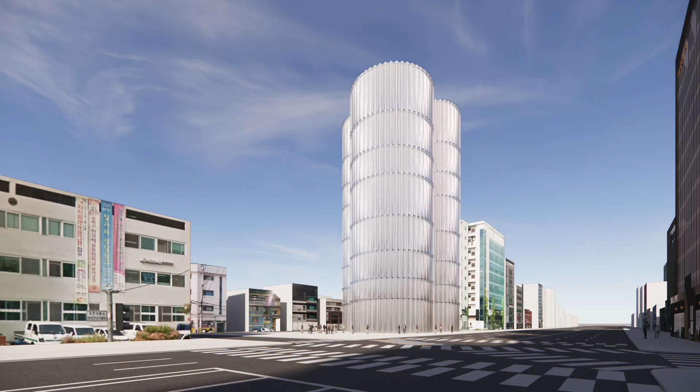We're also looking at doing this with walls as opposed to curtains. So there you see a walled version. Someone in the office said this looks like cells that are bifurcating. And there you see the overall structure. It's in the heart of Seoul.

As you can see, MKA hasn't yet helped us with the structure because there isn't any. Derek Beeman, who notably is not here, is not yet panicking over this.

And the idea is that within that double skin, the curtains, which not only can reveal things, can black things out, because they'll do VR in here, they'll do all kinds of things, but it can also, if they want the building to be highly transparent, they can actually get the idea of a totally transparent building with the curtain that's within the double skin actually rotating with the sun. So it allows it to have complete transparency on any of the faces.

Did everyone know what the idea of a double skin is, how it operates? The notion is that you create an air cavity, and then you put something into the air cavity that is a sacrificial layer that heats up, and you've created a vent stack. So in the summertime, it just flushes all the heat out, so you can actually have layers that are not that insulated. And then in the winter, you can actually take all that heat and pull it into the building and heat the building with it. We don't see it a lot in America because we don't like to maintain our buildings. But in other cultures, they actually spend a lot of money to maintain the building. And so this idea has a lot of legs.

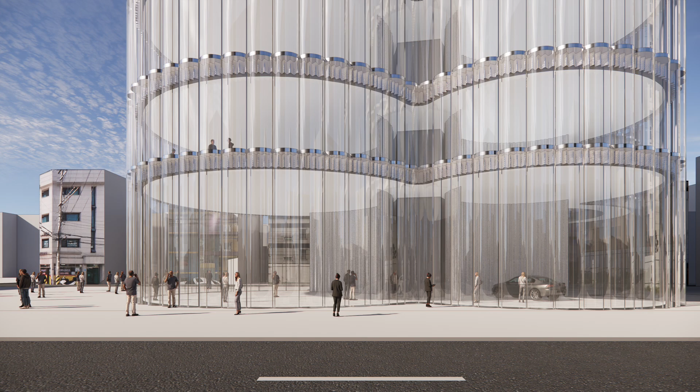But the beauty of it is it means you can use literally purely transparent glass. So these renderings aren't a deceit, that's literally - they do have low E coatings, but you can use like a transparent one or a silver one. So that is the last one, which I can't really say much about, other than it seems like some kind of viable next future of this exploration.